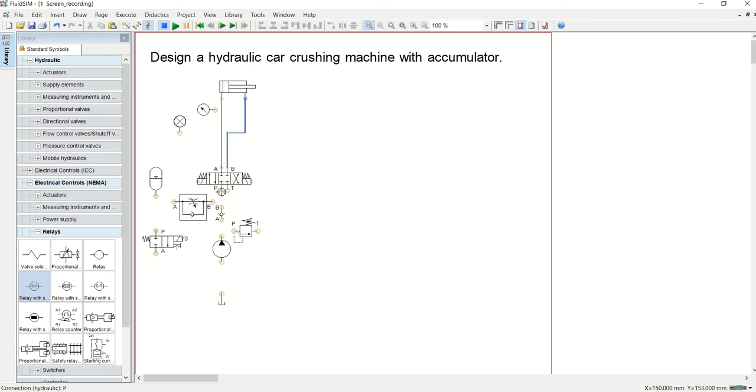Here you can see that I've got a non-return valve here also for the proper operation of the circuit. Now I'll explain that later. So I'll do the connection here. And then I will connect that to that. Then this to that. That.

So this is the hydraulic circuit and it's all done. The reason why I brought in this non-return valve is to make sure that the fluid, the oil that goes through this direction will not return when this accumulator is in operation. Because when it's in operation, it might like to return through this path back to the tank through the pump. So if this is there, this is not going to happen.

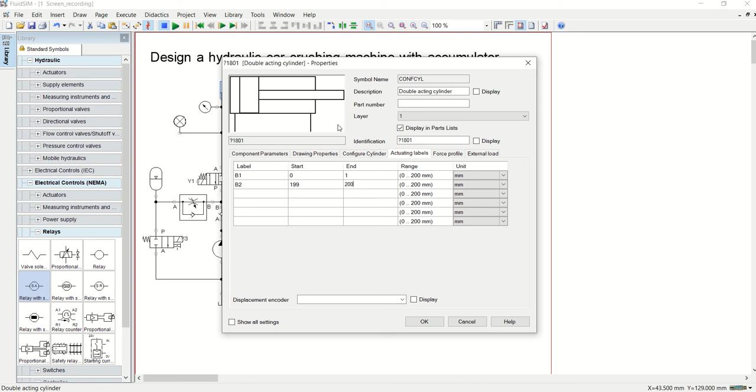And then B2 when the cylinder has outstroked. I want it to activate when it's almost at 200 millimeters. So 199 to 200 is fine. Because the maximum stroke for this cylinder is up to 200 millimeters in the software that I'm using. Otherwise, others may have even up to 5,000 or more. This has been configured. Now, this, I guess, has been configured already as Y2, so that's fine.

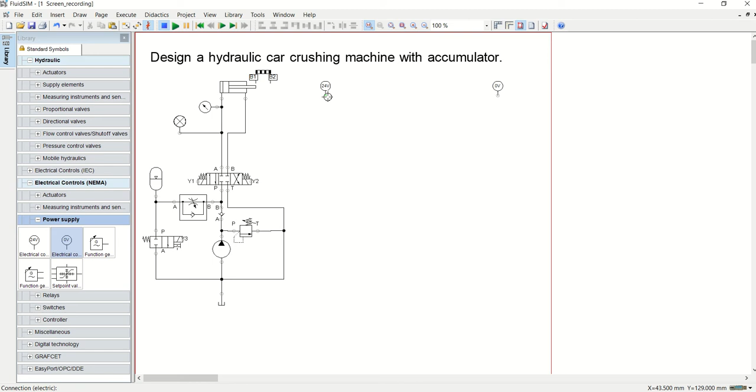Now, let's start with the electrical circuit, and this is going to be a ladder circuit. So I will go to the ladder symbols here, and then what I would need is to get the power supply. So I'll pick 24 volts, and then I'll pick neutral, which is 0. Then I'll put them apart this way. This is the way you construct your ladder circuit. So I'll connect the two together and then pull them apart so that the horizontal rungs will be the other components.

Now let's go straight away to the relays, and I would need 2 solenoids and 2 relay coils, one up here and then one down here. So what I'm going to do is to connect them horizontally to the ladders or the power rails. This will also be connected.

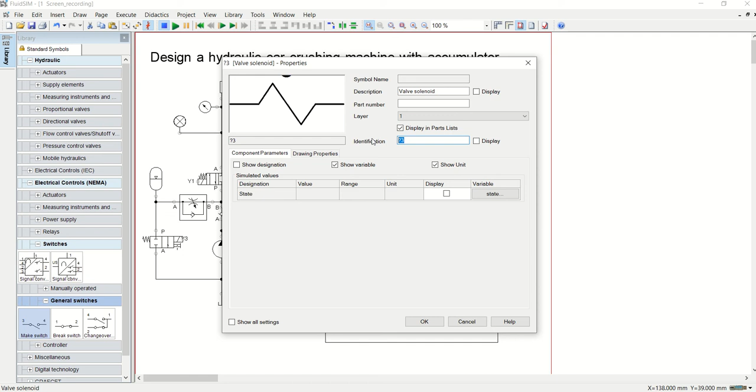Now I'm going to label the relays and the solenoids. So this one here is given as CR1. As you can see there, this will be CR2, that's control relay 2. The solenoid here will be Y1, which corresponds to that, and then the one here will be Y2. This one corresponds to that one here. So we've got this in place.

What we are going to do here is that because we want to get this part of the circuit latched, the switch for this relay will be given to this. So that's going to be CR1, and then the switch inside this relay will be given to that one. One of the switches inside that relay will be given to that.

Now we need switches to activate this and that solenoid here. So what we are going to do is that for Y1, it's relay 1 which is going to activate it. So that's going to be CR1. And for Y2, it's going to be this relay coil here that's going to activate it, and that's going to be CR2.

So the moment this relay is in operation, this switch has to close. The moment this relay is in operation, that switch has to close. And remember, relays can have 1 up to 4 switches. So one of the switches for this relay is being used on that, same as that one being used on this one. So this is done now. What else do we need?

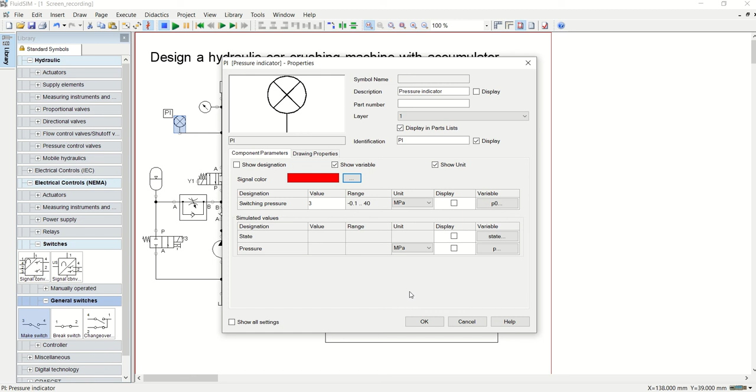We need a few safety devices in here. Let me just give this one as PI, that is pressure indicator. Let me go back there again to change this color to red, so that when the pressure indicator is on, it will come red depending on the pressure we set on this. And this is the pressure gauge, so I'll leave that one. What else do I need to do?

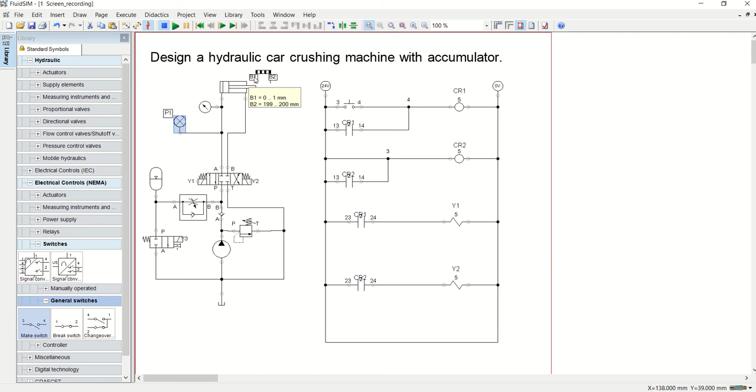What I have to do now is to bring in the conditions. The conditions are such that this one must be pressed, and the piston must also activate the first limit switch, that is B1. So before this cylinder will move, the cam on the piston must sit first on the limit switch B1, and then there should be human intervention, somebody pressing the switch here. That's the push button here, PB.

So to meet that condition, I'll bring this switch here to represent B1. So that is B1. So that we can meet the two conditions: the cam sitting on that, and then somebody pressing that, so that CR1 can now receive input.

The next will be this relay. It has to receive input as well. It only receives input when the piston has reached B2. Okay, so we will put this here and then keep that one as B2. And what else is left? A few things more to do.

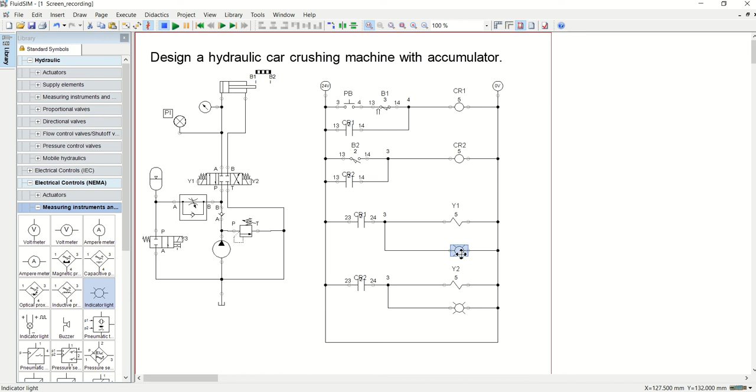So what we are trying to do is that the moment this solenoid is in operation, this light must come on. And the moment this is in operation, this light must come on. I will change the color to green, indicating it's on. And then I'll change the color of that one to green, indicating that it's on.

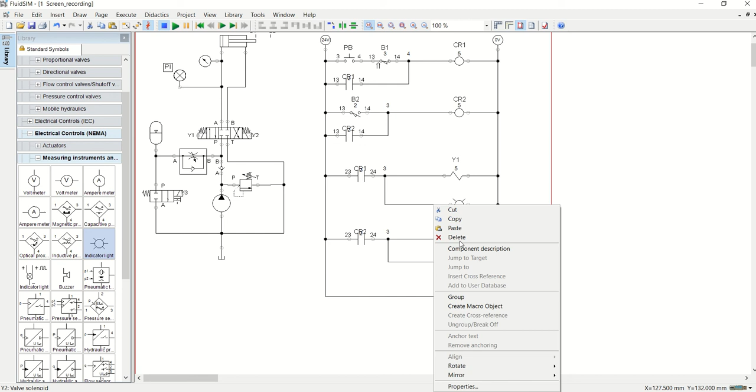Now, one safety thing I want to bring in here is I need one more of the solenoids to put it here to correspond to this one here. What we are trying to do is to operate this electrically.

So I'll go to switches again, and I'll pick a manual switch here. I'll pick this mushroom one and put it on here. Again, I will need one of these lights here.

Now, the reason why I have brought this solenoid here is to be able to use this electrically to operate this one. And the reason why this valve is here is that in case there is any fault in the system and we want to operate the system, this will be charged. This accumulator is already charged, and once it's charged, there is power in it, there is energy reserved in it, and it can actually do work.

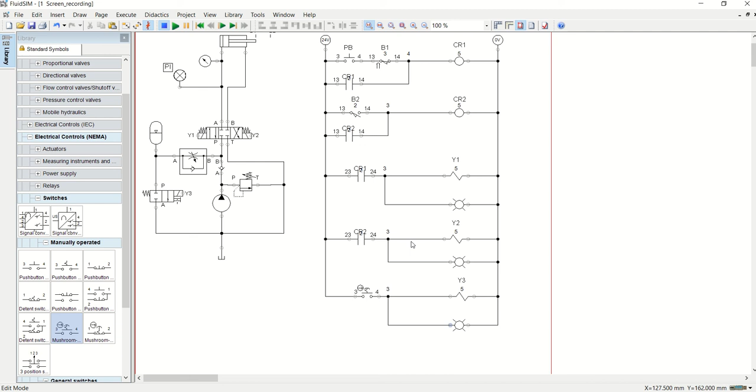So you can see the manual detent switch here, which can also be used to do it, or you can do it electrically, and when it's on, this light should come on. I've made it green, it should come on to tell everybody that this switch is in operation. We can make this one PB2.

Now, I guess everything is fine. We should be able to operate it to see if everything is working the way it should. But there are a few things here, and I will show you. Let's see, there are a few things that are supposed to come in here, this one and that one here. Yes, so here you could see that now the piston has moved out to its maximum position.

It's now activated B2, and relay 2 is activated, but this is not deactivated. CR1 is not deactivated, but CR2 is also in action, which means that CR1 should be deactivated, but it's not deactivated. So what should we do? What we can do is to put a normally closed CR2 switch here, so that the moment this is energized, that one opens. So let's do that and see what happens.

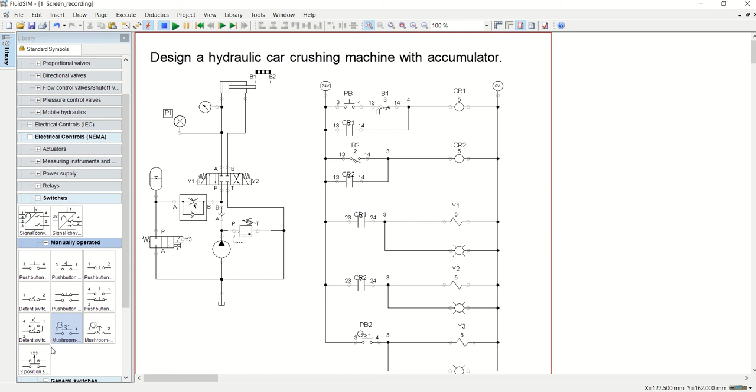So this is normally closed, and I will name this as CR2. Now let's simulate it once more and see what happens. So it's now working perfectly. But you can also see that this is not de-energized. This is not de-energized, Y2. So what we can do is to put a normally closed switch here and name that one as B1.

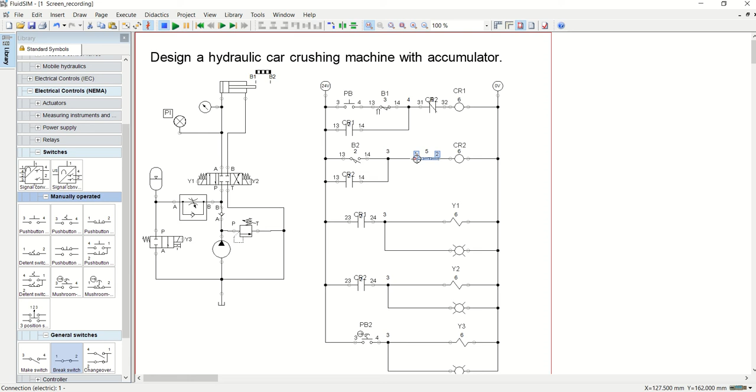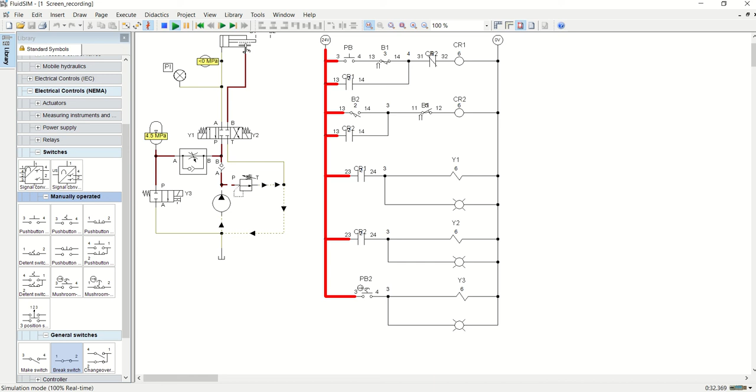Yeah, so the moment B1 is now made, that line here is deactivated, which means that this Y2 here will be deactivated. Now, this is what I was telling you. Can you see that because now the system is not in operation, this is charged to 4.5 MPa, depending on whatever pressure you will set, because this has to be set higher above the working pressure in the system here. So depending on whatever pressure you set here, this has to be set above that.

But now, as it is full, the relief valve now opens. That has to be set about 20% above the system working pressure here. Once that is open, in case there is a fault in the system, this is what we have to do. We have to de-energize this one. We can do it manually, so that the system is now depressurized and it can be safe for us to work on. Or we can also do this by pressing this switch here.

But when we press this and we work on the system and we finish, we have to release this because there is a detent switch here.